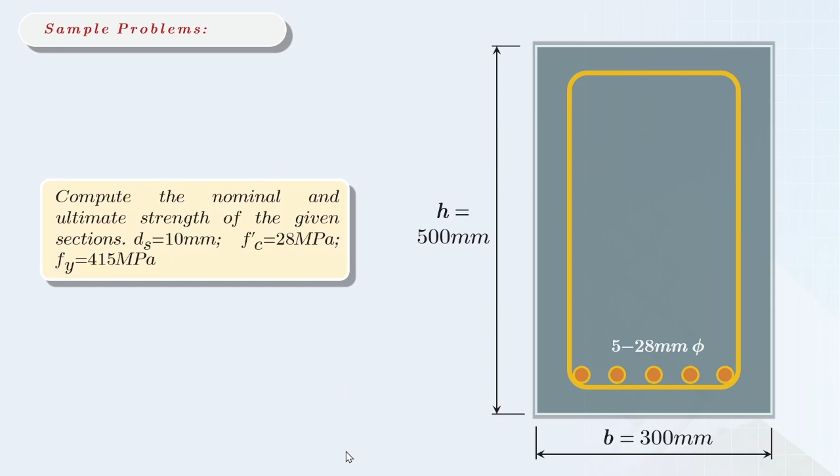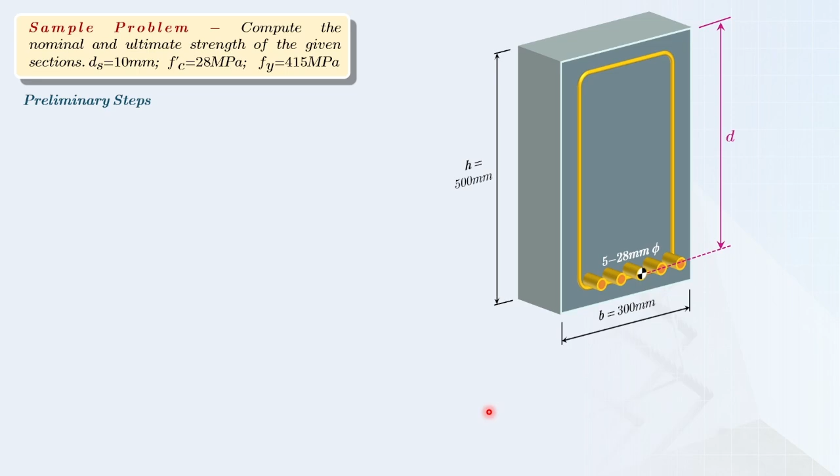So before we start or before we solve for the following strengths, what we need to do here is determine the preliminary or earlier steps so we can get the values that we want to get. So first, we need to solve for our effective depth.

So for our effective depth, what we need to do here is subtract from the height of the beam the location of the centroid of our main reinforcement. Our reference point goes from the bottom up to the center of our main reinforcement. Since the arrangement of our reinforcement is symmetrical, or should I say just one layer, so we can use this formula.

So to substitute the location of the centroid, what we need to do here is combine the concrete cover, diameter of stirrups, and the center of our main reinforcement rebars.

But of course, when we substitute this, the concrete cover is not directly mentioned in the problem, but as I mentioned before, when it's not mentioned in the problem, we can use the value of 40 millimeters as our assumed value for this.

So, 40 plus 10, which is the diameter of our stirrups wrapped around it, and then half of the diameter of our main reinforcement, subtracted from our height, which is 500 millimeters. So our effective depth here is now equal to 436 millimeters.

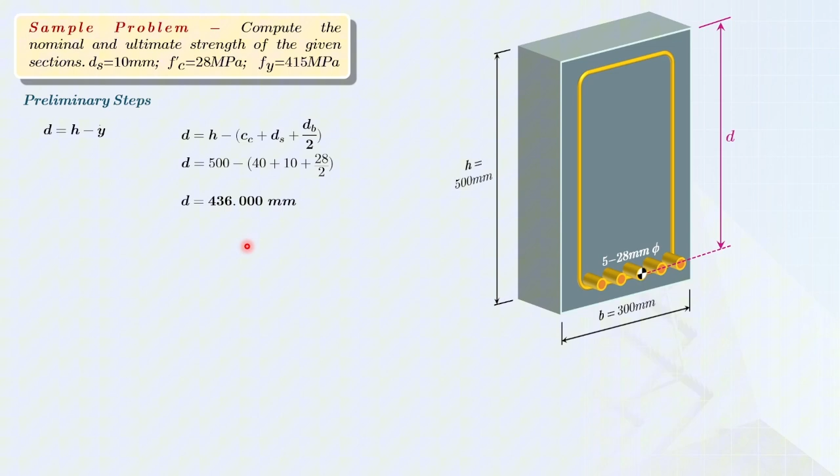So that's what we'll use all throughout our solution. So the first step that we'll do under the singly reinforced beam, in the analysis portion, is we need to assume failure. So we still have failure assumptions here.

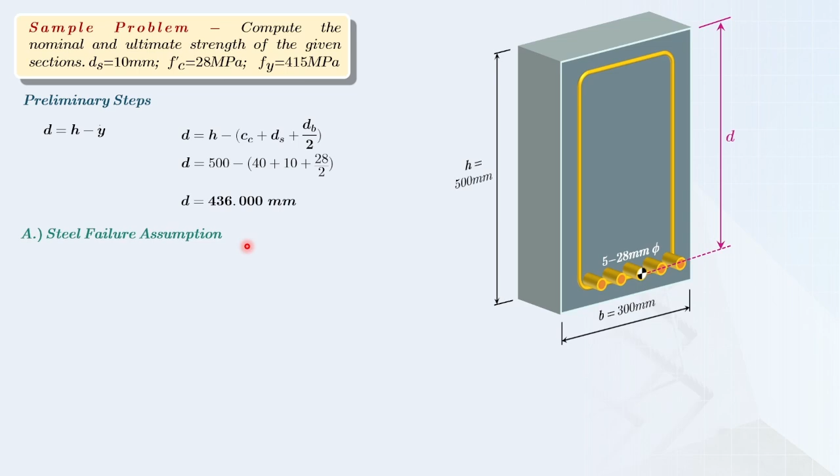So we have two types of failure assumptions. We can assume that the steel yields or does not yield, because our approach will be different depending on which assumption we use. But first, I will assume that this is yielding, or should I say assume steel yields.

So what does that mean? It simply means that the actual stress of our main reinforcement should be greater than or equal to our yielding strength. Or should I say the value of the stress of our main reinforcement can be equal to the 415 megapascal, which is given.

Okay, so the next thing that you need to do is get the value of beta 1, or the stress block factor. You can see it in the table that I presented in our discussion. To get the value of our beta 1, we need to base it on the value of our F prime C. So the value of our F prime C is 28 megapascal.

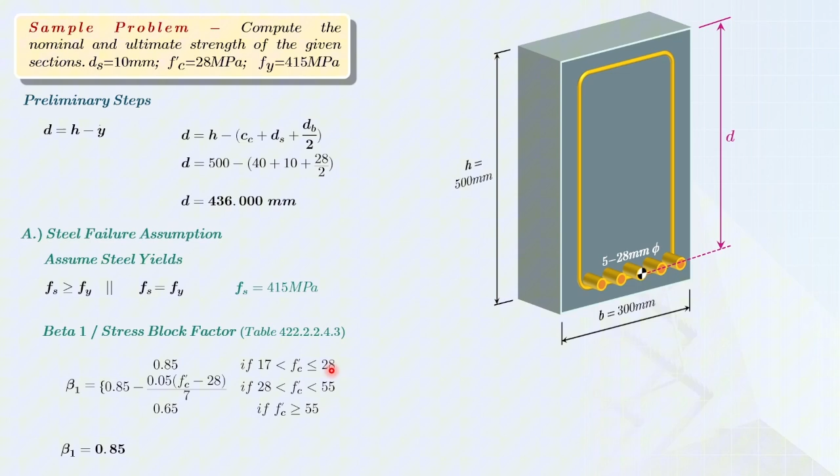So that means it will fall under the first condition, if the value of your F prime C is between 17 and 28 megapascal. So, our beta 1 here is now equal to 0.85.

So why do we need to use our beta 1? Because when we get to the parabolic stress block, or the depth of the stress block itself, we need to emphasize our equilibrium condition, which is compression equals tension. Let me show you the expanded form, which is this one. We know that the depth of our rectangular stress block can be determined by simply multiplying the depth of the parabolic stress block, or depth of stress block, by our beta 1.

Okay, so let's substitute into our equilibrium compatibility equations, which is this one. So we already replaced A in terms of C. That's our goal, we need to get the value of C here.

So given all our earlier values: 0.85 multiplied by 28, which is our F prime C, multiplied by our beta 1, 0.85 C, which is what we're solving for, and then the width of our beam. This is now equal to the 5 pieces of area of our 28 millimeter bars, so that's pi times 28 squared over 4, a circle. Then we multiply by our assumed value of yielding strength, which is 415 megapascal.

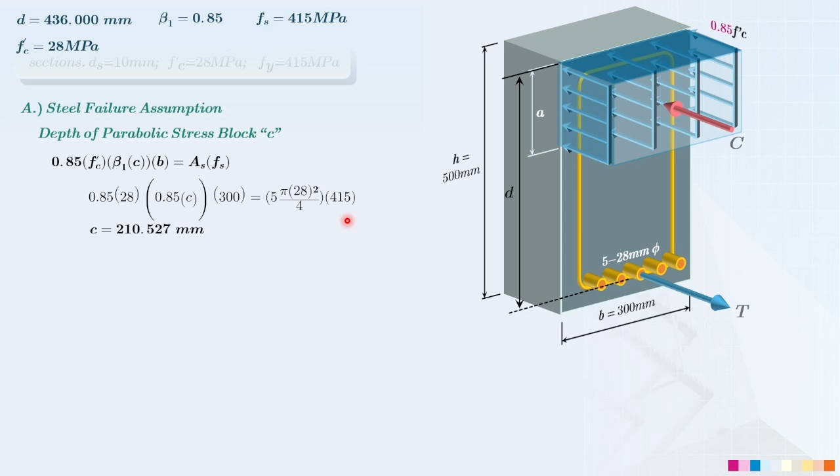So once we solve for the value of C, this is now equal to 210.527 millimeters. But we are not finished yet, because this was still just an assumption. So the next step after solving the value of depth of stress block is you need to check the assumption, to confirm if the steel really yields.

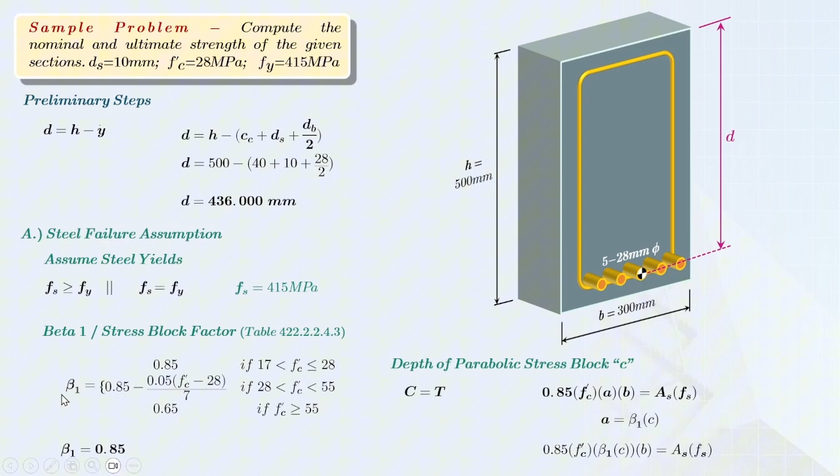So what this means, class, is that this is greater than our 415 megapascal, which was our assumption earlier — the first one I mentioned, assume steel yields. So what does that mean? It means the steel will yield. So our computed value of C is correct — this is now your legitimate depth of stress block, 210.527 millimeters.

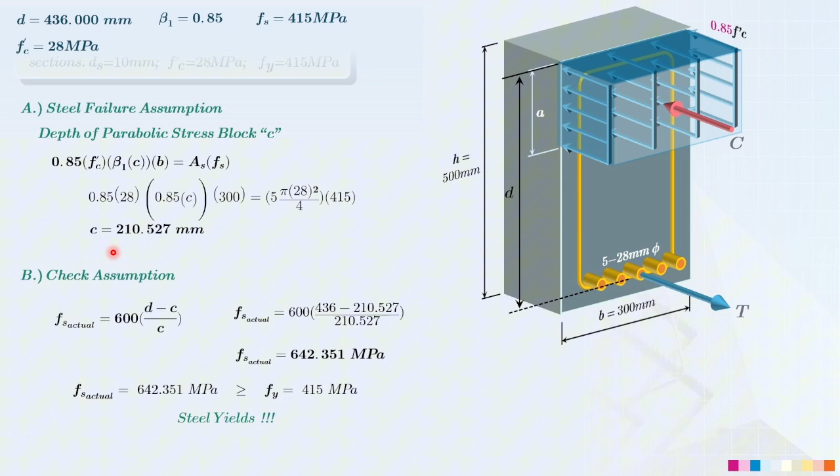So what's the next step? Since we've confirmed our assumption is correct using this value, let's get the equivalent rectangular stress block — the depth of the rectangular stress block itself, using this equation. Substitute the value of C together with our beta 1: 0.85 multiplied by 210.527. So we get the depth of rectangular stress block, which is now equal to 178.948 millimeters.

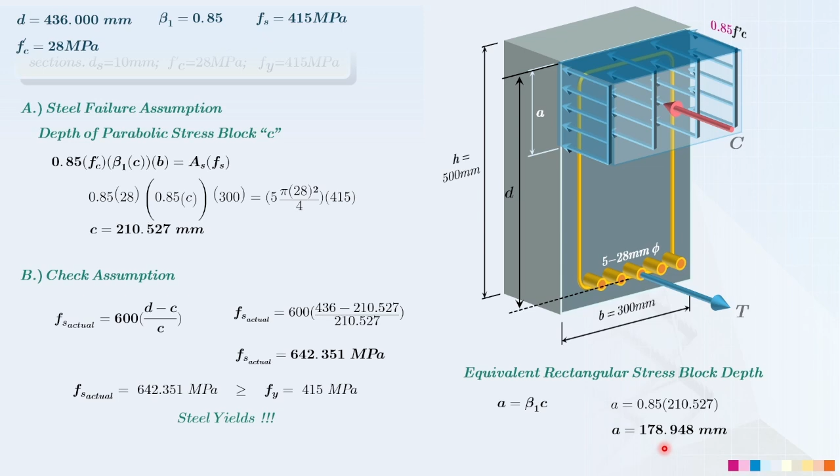Okay, so we're done with the second step. Let's do the third step. Here we need to check our strain, because strain is the dependent variable when determining our strength reduction factor, in order to get the ultimate moment. So using this formula, substitute as 0.003 multiplied by 436 minus 210.527, divided by 210.527. So the strain we get for our steel reinforcement is now 0.00321.

Okay, so alternatively, you can also determine the strain using the formula from strength of materials. But the difference is, what you use here is the actual stress we got earlier, not the 415 — what we use here is 642.351 over our modulus of elasticity, which is 200,000 megapascal. After that, you get the same result. So either of the two — using this derived formula, the ratio and proportion relationship of our effective depth and value of C, or using strength of materials — either way, you'll get the same strain of your steel reinforcement.

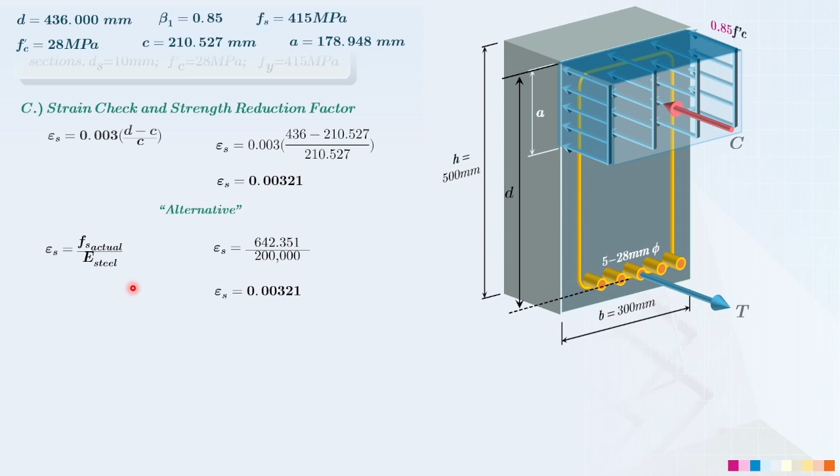So it turns out that our value, 0.00321, is between 0.002 and 0.005. Remember, 0.002 is the strain under compression control, and 0.005 is the strain under tension control. So our actual strain is between compression controlled and tension controlled. That means, by definition, this is the interpretation for our transition control.

Now, what does it mean when we have transition control when it comes to the strength reduction factor? Using this criteria, to get our strength reduction factor, we will use this formula itself to get the actual value of the strength reduction factor.

Not 0.9, not 0.65, because our strength reduction is in between, since our strain is between 0.002 and 0.005. Okay, so let's utilize this equation.

So this becomes 0.65 plus 0.25, multiplied by the actual steel strain, which is 0.00321 minus 0.002, divided by 0.005 minus 0.002. So our strength reduction factor here is now 0.751, which we will use when we get the ultimate or design moment.

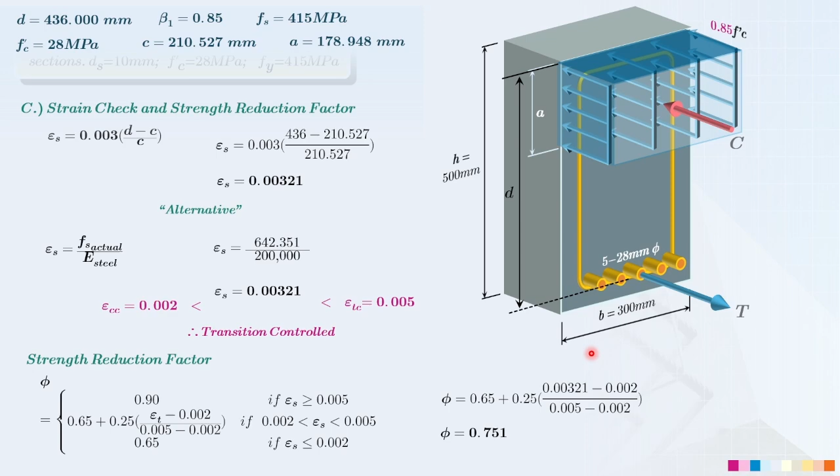This is what we multiply together with our nominal strength. Alright, so let's get the flexural strength. This is actually the last step for our sample problem.

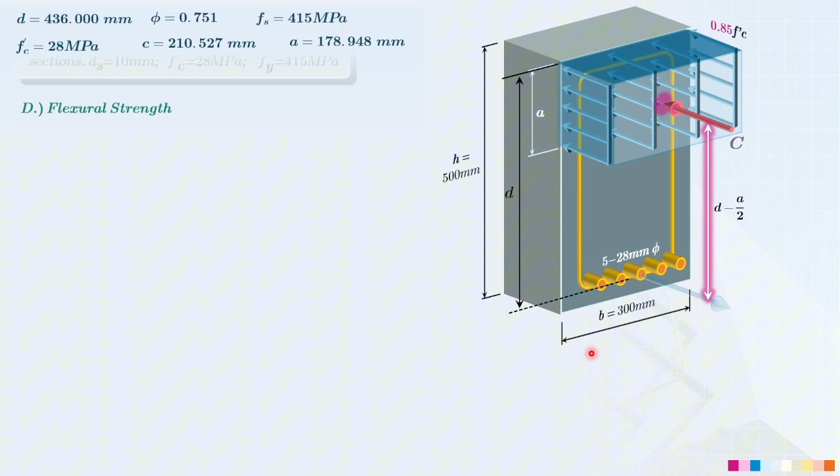But first, to make it easier to absorb, let's get the nominal flexural strength first. In this sample problem, the formula I'll use for the nominal flexural strength is the one derived from compression.

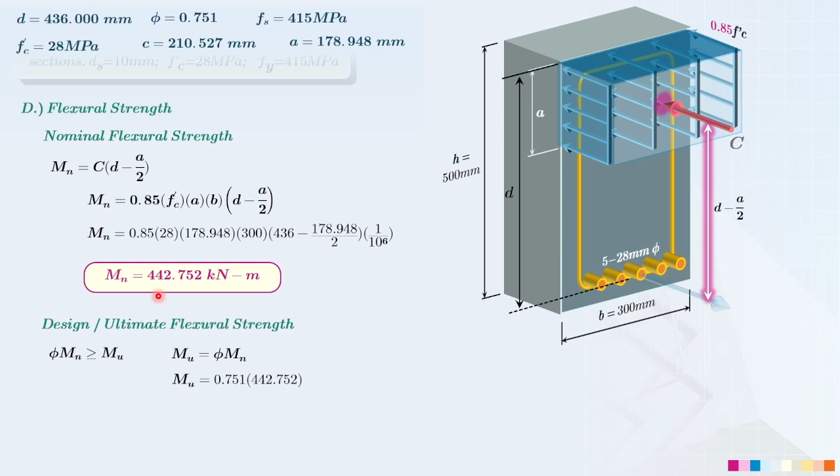However, the condition we can use here is to simply set them equal. We got our strength reduction factor earlier, which is 0.751, under transition control, and we multiply it with our nominal strength, which is 442.752. So the result for our ultimate flexural strength is now 332.543 kilonewton meters. And this is our first sample problem.

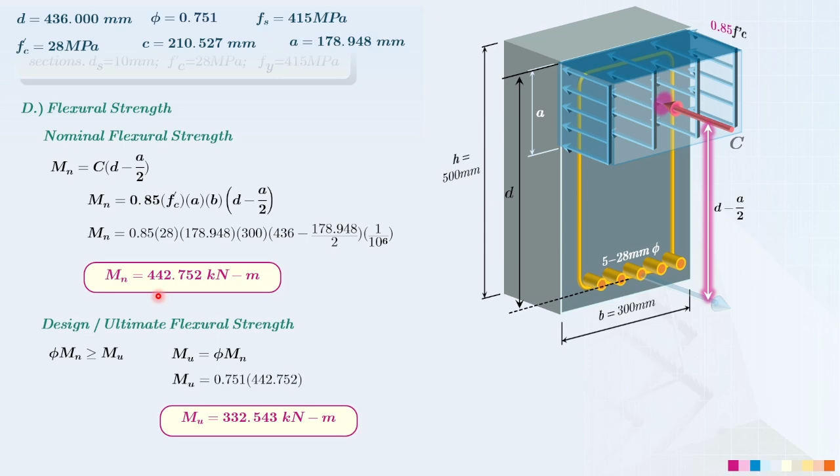So it's easy to use or easy to follow, our 4 steps. Later on, in our next sample problem, we can actually reduce it to only 3 steps. So this is sample problem number 1. We will have the next sample problem under this analysis portion. Thank you.